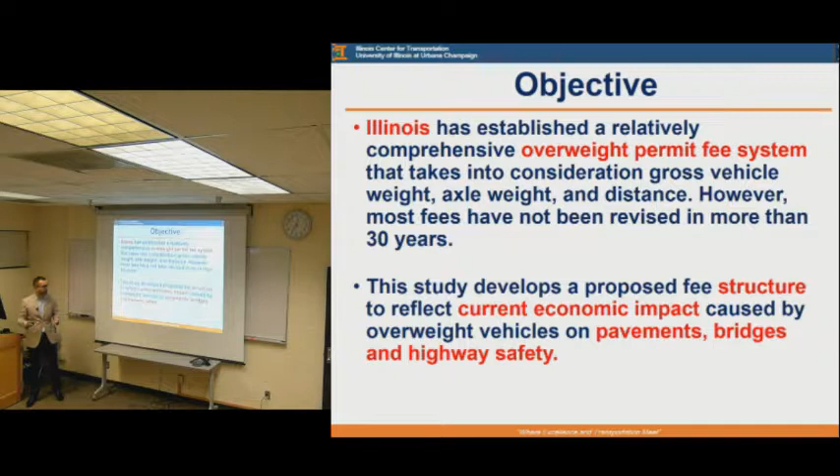So the objective of the study was basically proposing a new fee structure with the motivation and objective of capturing the up-to-date and current economic impact caused by overweight vehicles on highway systems, specifically for pavements, bridges, and highway safety. I hope so far I've given a clear image about the motivation and objective of the study.

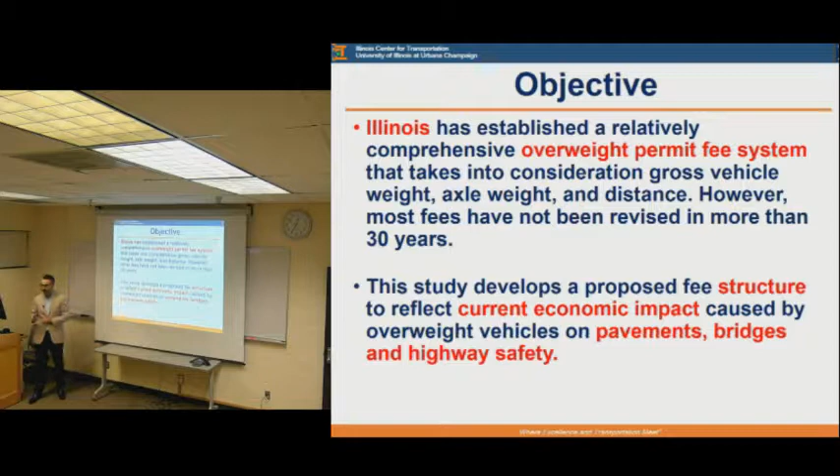Now I'm going to start talking about the methodology that we follow. We follow a fully data-driven approach for fee development because of its ability to make the decision more generalized as compared to mechanistic approaches. As a natural first step of any data-driven framework, we collected a bunch of databases about the traffic, infrastructure conditions, crash databases, and so on.

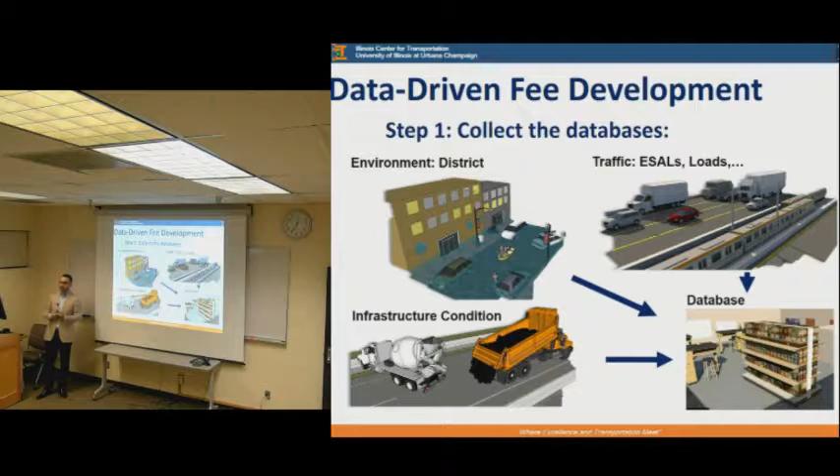Later, we used state-of-the-art prediction and classification algorithms to develop models to predict a bunch of variables, for example crash number, pavement condition, bridge deck condition, and so on. We then used these algorithms to develop 3 individual fees: bridge fee, pavement fee, and safety fee, and combined all these individual fees into one final fee, which was our end product.

So I think it's a good time for me to take a moment and give a little more information about the project and acknowledge my co-authors. This project was completed last summer, funded by IDOT and managed by the permit unit chief, who also helped us a lot from IDOT. The principal investigator of this project was Professor Erman.

He managed the entire process of developing the individual fees. Additionally, he was extensively involved in the bridge fee development because I was the PhD student working on that part. The pavement fee was developed by Professor Hao Wang from Rutgers University and one of his students, Jingzhang Zhao. The safety fee was developed by Professor Ouyang from UIC and one of his students, Antoine Petit.

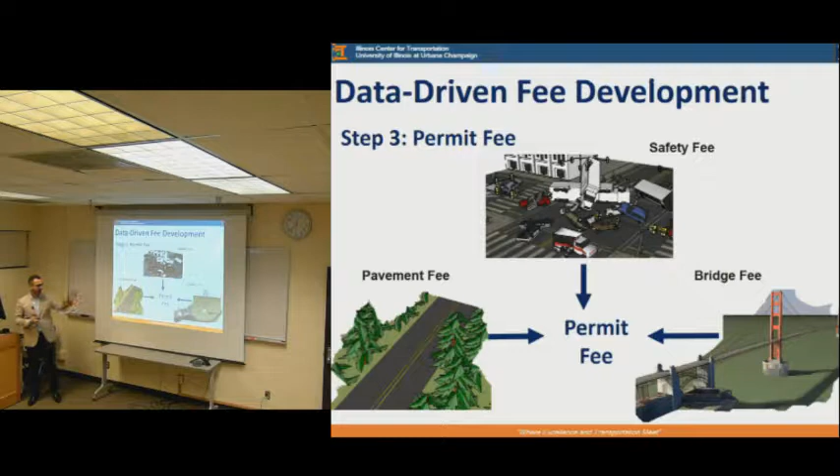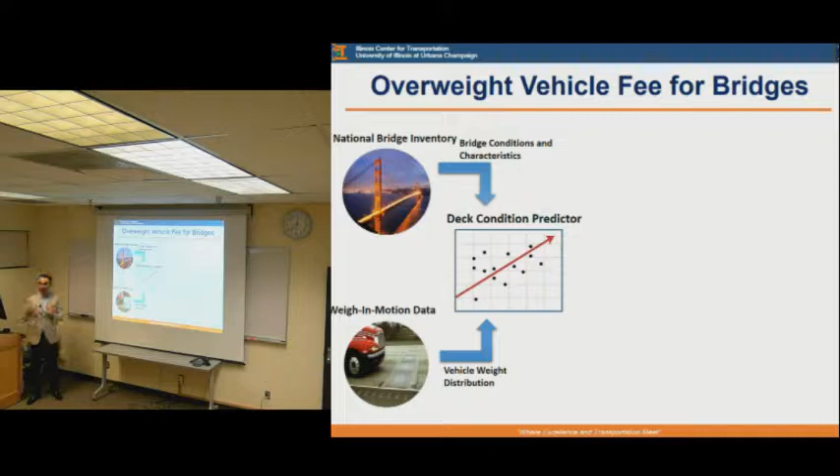I'll start with the bridge damage cost analysis, or bridge fee. This is the framework we are following for the bridge fee development. We are using 2 different databases: National Bridge Inventory, NBI, and the weigh-in-motion data. From the National Bridge Inventory, we obtain variables regarding bridge characteristics, such as age, location of the bridge, and so on.

But NBI doesn't have any information regarding applied load, so for this information we had to use another database, the weigh-in-motion data, to get the load information. Later, we insert those variables into a machine learning algorithm, or artificial intelligence algorithm, whatever you want to call it, to predict the deck conditions with respect to those variables. We use these machine learning algorithms under 2 scenarios: with and without damaging trucks.

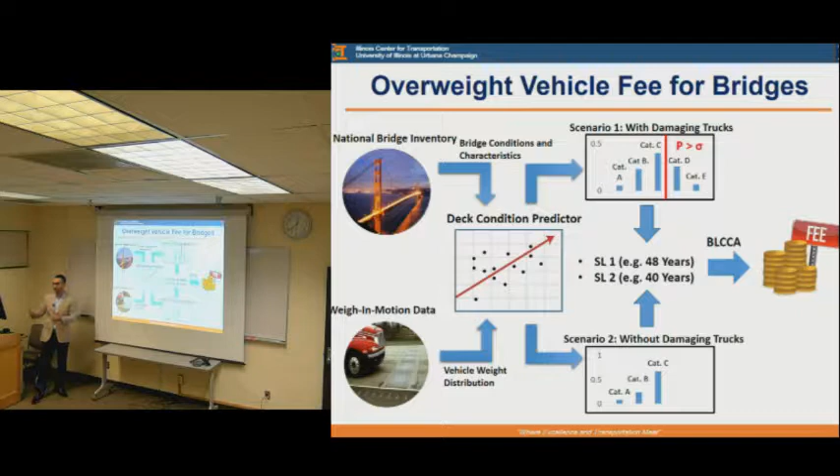As one may expect, these 2 scenarios are producing different service lives - one, for example, let's say 40 years, the other 48 years. The next step was quantifying this difference in service life in terms of cost, and the link was conducting a bridge life cycle cost analysis, which gives us the final fee.

Now I'm going to introduce the National Bridge Inventory. That's the online database maintained by FHWA. It's publicly available and has many variables regarding bridge characteristics, like age, latitude, longitude, and so on. It also has a variable regarding the condition of the bridge in terms of 3 bridge parts: deck, superstructure, and substructure. Condition data comes from manual inspections, meaning an engineer goes to a bridge, follows a guideline, and grades the bridge, ranging from 0 to 9, with 9 being excellent and 0 being failure.

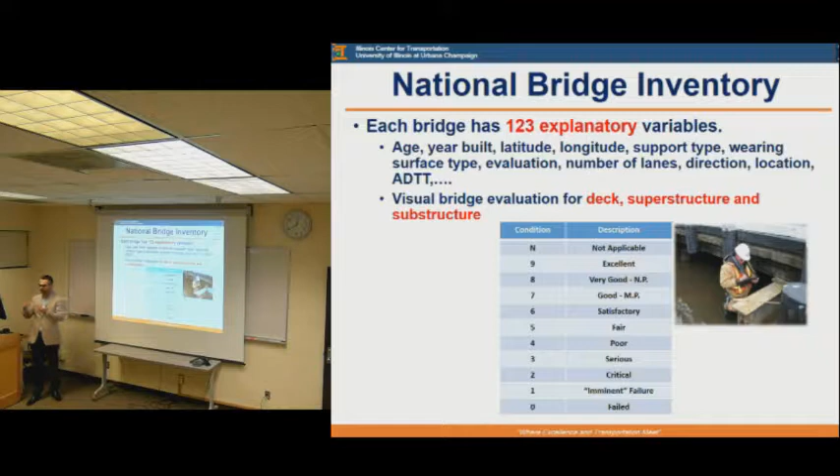So in this study, we are focusing on predicting deck condition, as everyone else does in the literature, because it has been reported in the literature that the deck is the part of the bridge that deteriorates faster compared to other parts.

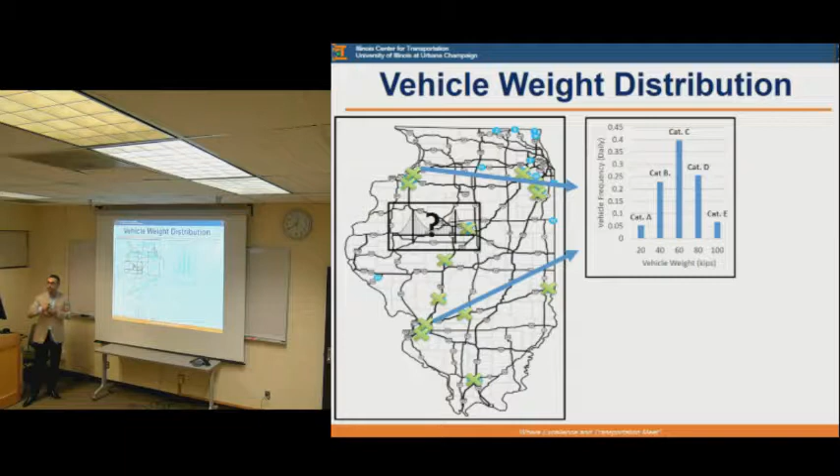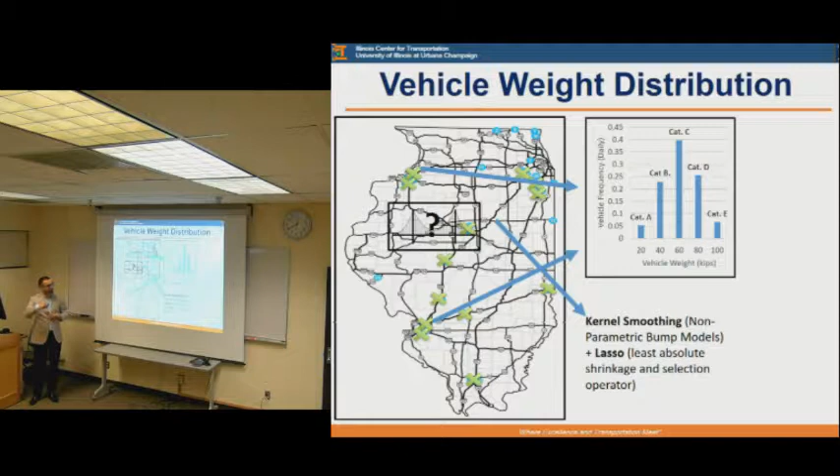But the challenge here was that we don't have this information on all the bridges over the network. We had around 20 weigh-in-motion stations, but there are thousands of bridges distributed over the network. So the goal was interpolating or estimating a similar distribution for all the bridges distributed over the network. The solution we came up with used kernel smoothing, Gaussian mixture models, or non-parametric bump models combined with lasso. This approach enabled us to approximate this curve for all the bridges over the network.

The next step was variable selection. We had around 120 variables from NBI, plus more variables coming from the weigh-in-motion data. We had to do some kind of variable selection because we cannot insert all these variables into machine learning algorithms, since it's going to cause overfitting, high variance, and low testing accuracy.

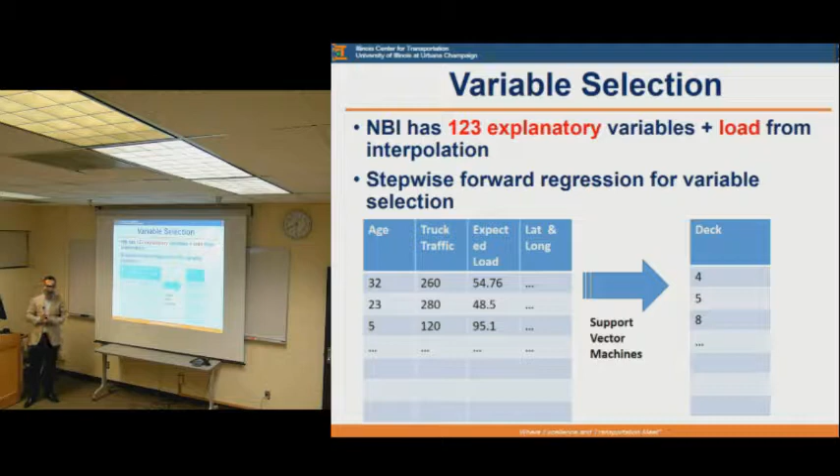For this variable selection, we used an algorithm called stepwise forward regression. At the end of the day, this is what we had: a simple input-output model with the selected inputs. We put those inputs into a machine learning algorithm called support vector machine, which I will explain soon, and then we were predicting the deck conditions.

A quick introduction to support vector machines: it's one of the most commonly used and popular machine learning algorithms in the literature. In a simple sense, it creates a linear hyperplane by solving an optimization problem. It works perfectly if your data is linearly separable, but we all know linearity is not a very realistic assumption for real-life problems.

So we did some data processing, in two steps. One was mapping the data: we mapped this condition data into three categories - good, medium, and poor. The motivation behind the mapping was high subjectivity in the NBI data, because as I mentioned before, that condition data comes from manual inspection, and it's very subjective.

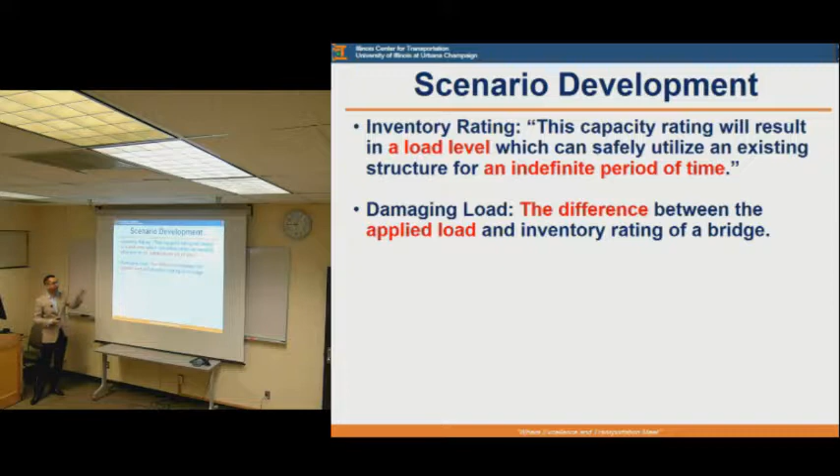So we are kind of leveraging that variable that's currently available in NBI for our favor, and we are developing a new variable that we call damaging load - the difference between the applied load and the inventory rating of a bridge.

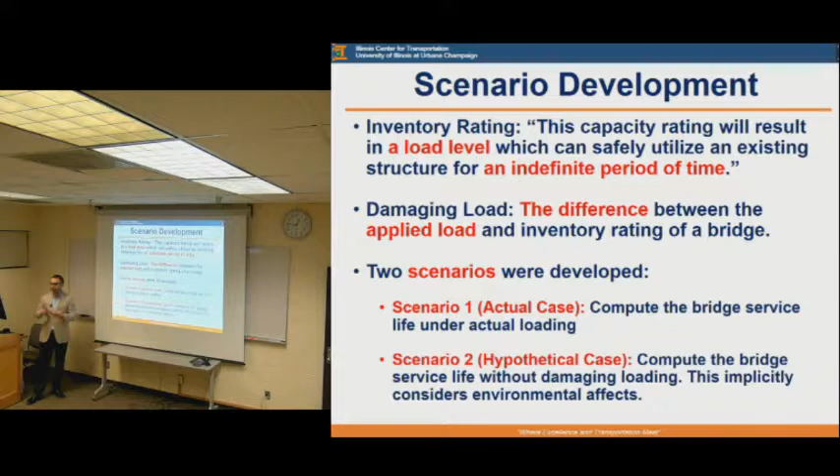Under this variable, we are developing two scenarios. One is the actual case using actual traffic obtained from weigh-in-motion data, which includes the damaging trucks and loads. In the second scenario, we remove the damaging load and try to quantify the difference between these two scenarios. In theory, if you remove the damaging load, your bridge should last forever, right? But our machine learning algorithm finds that even these bridges without any damaging load are failing as age increases.

So it means we are implicitly considering the environmental impacts on the bridge condition. The second thing I'm going to talk about now is to demonstrate the framework that we developed on one bridge. So this is the first step.

I collected all these variables from NBI and put them into my machine learning algorithms, apart from age. With age, what I do is put age as 1 year, predict deck condition, then increase age by 1 and predict another deck condition. I keep increasing the age of the bridge until the predicted deck condition becomes 4 or lower, which is defined as the failure limit for deck. By following this framework, I calculate the service life of a bridge.

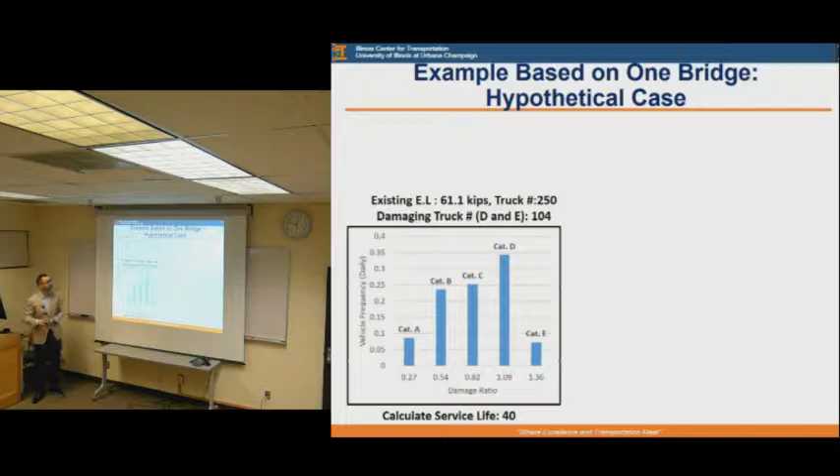Then I go to the second step, the hypothetical case, and follow these 3 steps. First, I extract the inventory rating of a bridge from NBI. Then I normalize the x-axis: before it was the gross weight of the vehicles, now it's a ratio. A ratio more than 1 means I am applying a load on a bridge higher than the inventory rating, which reduces the fatigue life of the bridges.

So I label those trucks in that category as damaging trucks, and for the hypothetical case, I convert them into non-damaging trucks. When doing this, I want to make sure the amount of goods being carried on a bridge stays the same, meaning that if I apply the number of trucks with the expected load, they are going to be the same. This is illustrated in this situation.

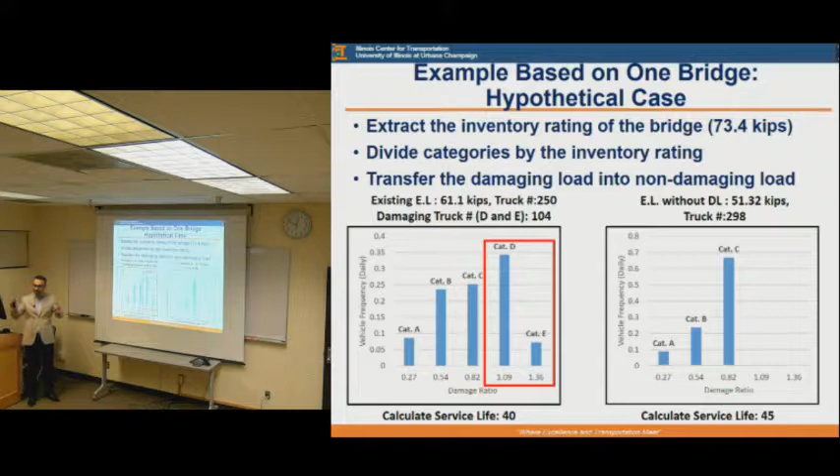For example, in the actual case I have 250 trucks, and in the hypothetical case I have 298 trucks. What I did is convert bigger trucks into smaller trucks so that they are below the inventory rating of the bridge. I have the new sets of inputs, and I calculate the service life by repeating the same procedure.

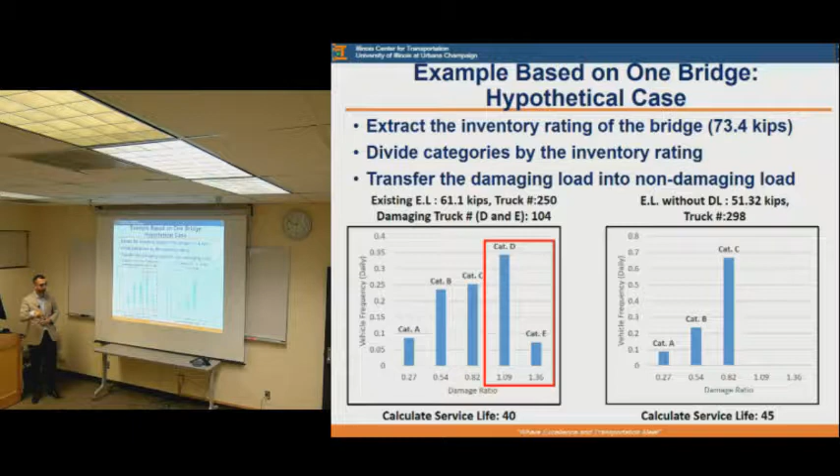The next step is very easy. I just want to quantify the difference between these two scenarios in terms of cost. We conducted a bridge life cycle cost assessment. IDOT provided us with a very detailed report to extract this information: what's the cost of new construction, what's the cost of deck replacement, and so on.

Then we calculated equivalent uniform annual cost using this formulation. It's essentially a function that takes the service life of the bridge as an input and returns the uniform annual cost. So we put 40 and 45 as inputs to this EUAC. It gives the cost difference between these two scenarios. Then we calculate the damaging load, and finally we were able to calculate the damage cost as a function of load and area.

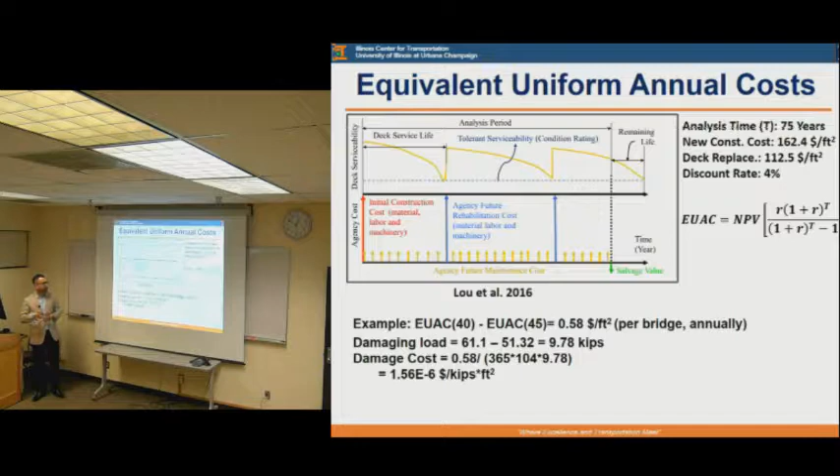So I still need information to convert that cost into a fee by integrating the miles. The way we do it is by adding extra information to our cost. What are those extra informations? First, number of bridges, then the center line mileage, which enabled us to compute the bridge per mile. IDOT also provided us with the average deck area in the state of Illinois.

Now I'm going to start talking about the pavement damage and cost analysis, and how we develop the pavement fee. So this is the framework that we follow for pavement fee development.

We collected 3 different databases: pavement condition, climatic data, and truck traffic. Then we developed the pavement performance model, and conducted the pavement life cycle cost assessment as we did in the bridge part. In order to add the mile information to our fee, we use the permit database, also provided by IDOT, to extract the vehicle miles traveled by overweight vehicles. Finally, we calculate the pavement damage cost.

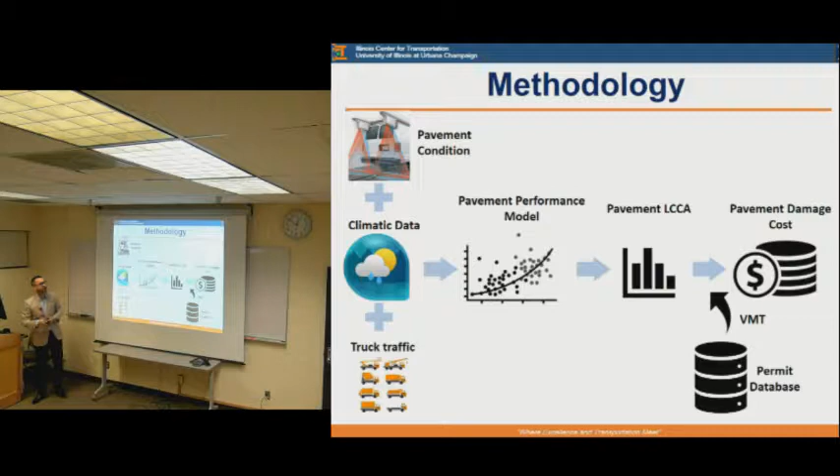The pavement performance model started with some explanatory variable analysis, like we did in the bridge part. The goal was to identify the variables that would help us predict changes in the condition rating survey.

We tried a couple of other forms to develop the regression equation, and found that this equation gave us the higher accuracy.

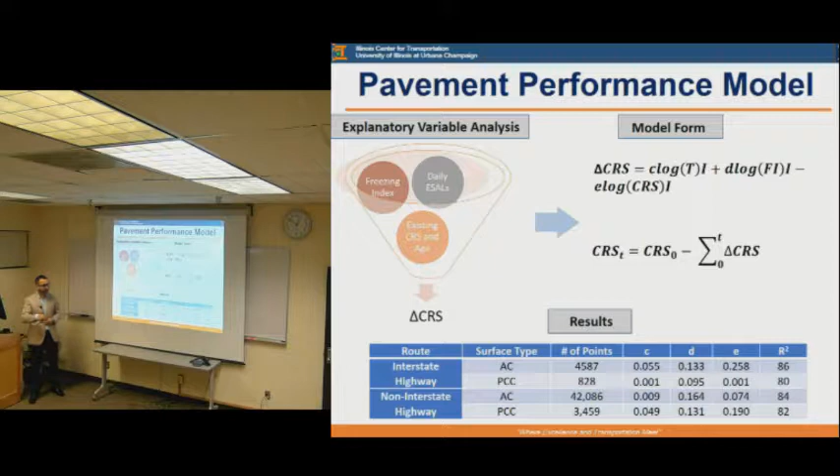To increase the performance of the regression equations, we grouped our data into four categories based on surface type and highway type: asphalt interstate, concrete interstate, asphalt non-interstate, and concrete non-interstate. For each group we developed a regression algorithm, and the results are given in this table. We have good accuracy.

The second step was conducting life cycle cost analysis. We basically followed the IDOT guideline for pavement LCCA. IDOT gives the regular maintenance activities for each surface type with their corresponding cost, so we gathered this information and did the basic pavement LCCA.

Then we needed information about how far overweight vehicles are traveling through the states. We extracted that information from the permit database to get the vehicle miles traveled by overweight vehicles. Finally, this is our final step.

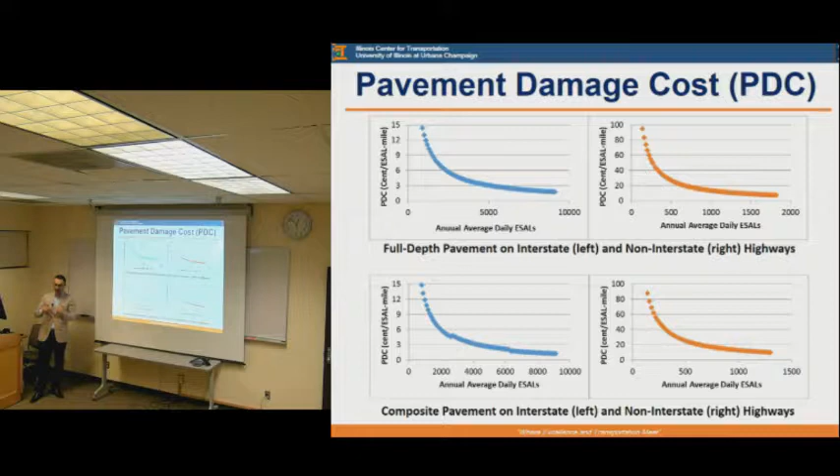We computed pavement damage cost for each road type, each surface type, and with changing traffic levels. But we were expected to report one final equation, so we made some statistical assumptions and took the weighted average of those costs that I just showed. This is our final pavement damage cost.

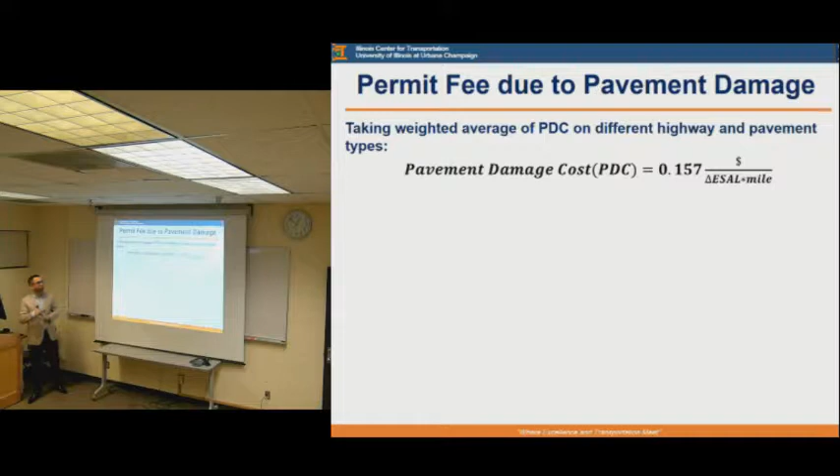To convert this cost into a fee, we compute the delta ESALs, which is defined as removing the excess weight on the axles of overweight vehicles from the legal scenario we are defining. This is how we compute the final pavement fee.

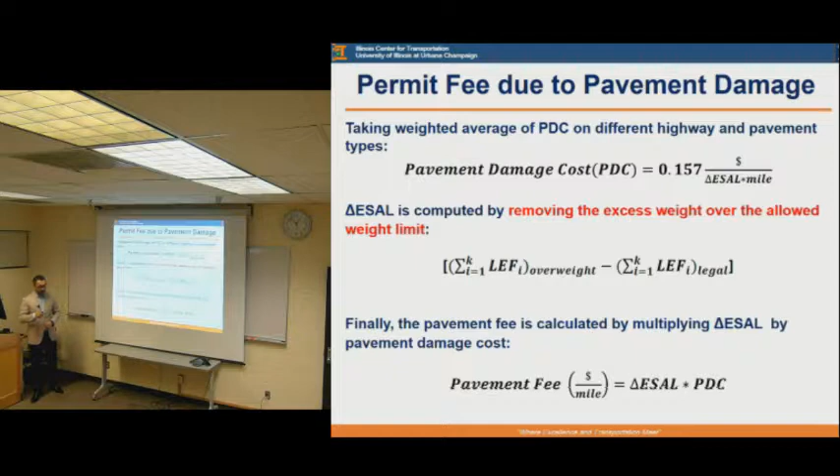Now I'm going to talk about the safety cost quantification, which is the final part of the fee. Safety performance functions are the essential part of the safety cost. Many people develop these functions, which link traffic variables such as AADT or the length of the road to the expected yearly number of crashes.

We adapted one of those functions to our study by adding the term for overweight trucks. Once you have this equation, the rest of the work becomes much easier. But to get this equation, you need two more variables: the expected yearly number of crashes, and the overweight traffic on each road segment.

For the first variable, I'll explain how we obtained it. But before that, similar to what we did for the pavement part, we also grouped the data here so we could increase the accuracy of these regression algorithms.

For mu, the expected number of crashes, we basically fit a negative binomial regression to our crash database. Once you fit it using maximum likelihood, you can easily obtain mu for each subcategory of the data.

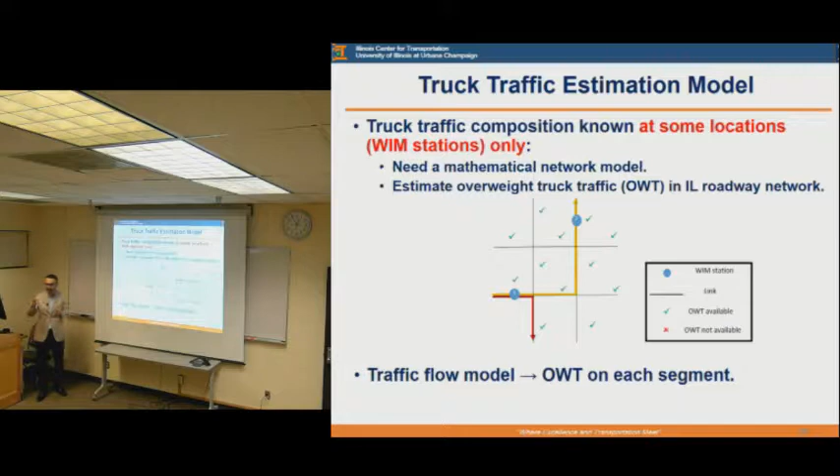Over the highway network, to get these unknown truck compositions, we model the entire traffic as a mathematical model so we can estimate the truck compositions on each road segment in the network. This is just a snapshot of the model. I won't go into details, but I'll say that basically it generates truck traffic composition on each road segment.

There are two things this model makes sure of. One is that our generated truck composition matches the data at the weigh-in-motion stations.

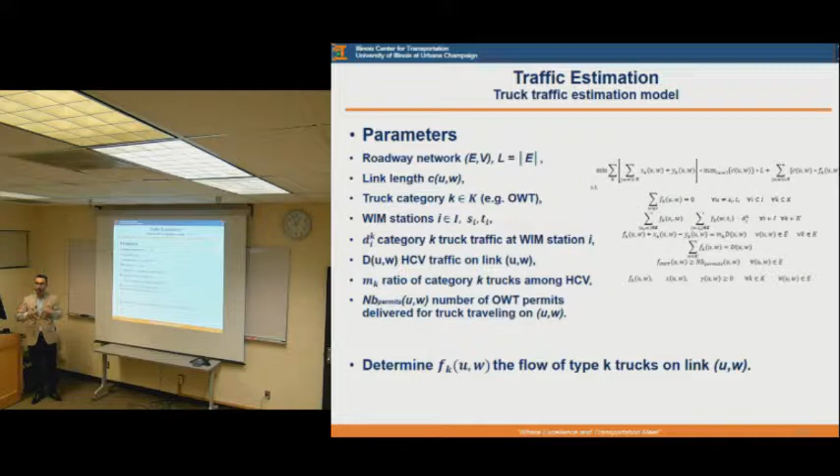And the second, that our generated truck composition is compatible with the permit database we were provided with. This is the last step to get these regression coefficients in the safety performance function. You can do it easily using any kind of library.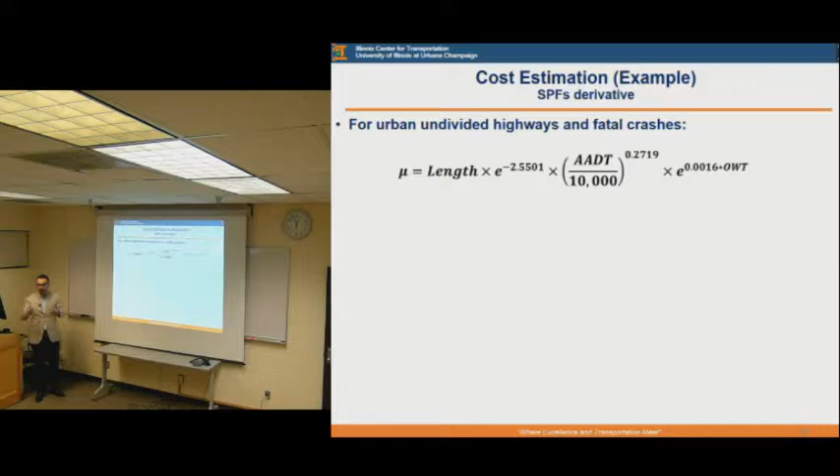Once you have this equation, what you're interested in is the effect of this variable on the expected number of crashes. The way we answer this question is by taking the derivative of this equation with respect to this variable, and it gives us this long equation.

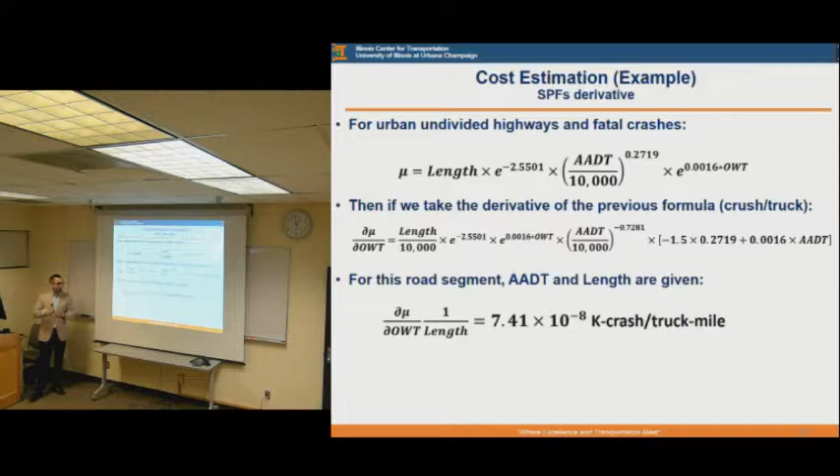Once we integrate, once we put the traffic and the length information into that equation, we were able to finalize the safety cost. Again, this was only for one category.

We also propose some kind of innovative way of issuing a permit using this framework, because IDOT is already using an online system for truck owners and drivers. Basically, they go into this online system, put their origin and destination, and IDOT provides them with the route and the permit fee. So we say let's leverage this existing system - when they put the origin and destination, we can extract how many bridges those trucks are going to pass over with their load carrying capacity.

What is the road type? Are they going to travel over asphalt concrete or Portland cement concrete? We're saying we can extract all this route specific information, insert it into our framework so that we can compute the payment, the permit fee, in a more accurate and fairer way.

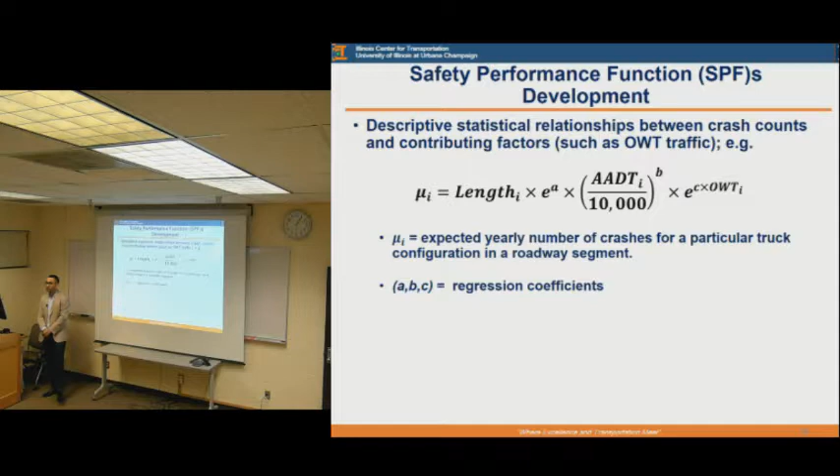Right, but you're not doing averaging there? So far this is a bit of a policy implementation issue. If they want to go with one formula like this, then we have to average them, because we were asked to provide a formula. But if we were asked to go with this more localized framework instead, then we don't have to average.

Regarding safety, and even with the ideal implementation where it becomes more localized and not an average value, how do you justify charging, say, a fleet of trucks that are actually more safe than the ones that are putting in the data points for the safety or the crashes themselves?